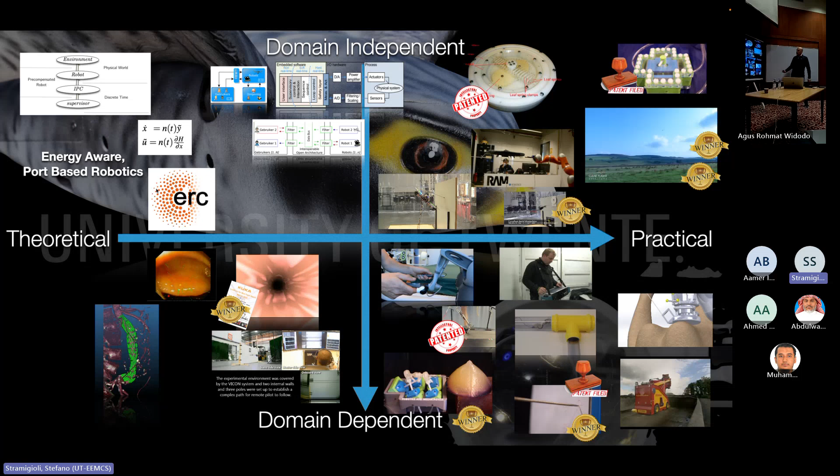So this is just a glimpse of some of the activities of the lab. It's really from very fundamental theoretical work to very practical work. Some things are domain independence, like software architectures that you can apply to any kind of robot. Or if you go specifically to the medical domain, you need a lot of knowledge in the domain itself, or in inspection and maintenance, you should know about ATEX regulation for explosion and all these kinds of things. This is a glimpse. These are some of the things I will talk about, mostly what is here.

Tomorrow I will show some of the actuation technology which we developed, which is MRI technology. We have a patent, we have a company now with 35 people working in London. I cannot say a lot about that company, but we'll actually hear, I'm sure, in the coming year.

So more about the talk now. Robots are physical systems, and energy is the mathematical embodiment of the invariance of a lot of physical laws. I'll come to that later.

Physical interaction of robots with humans or the world is the core of a lot of robotics applications, and mathematics is the powerful tool the engineer has at their disposal. But nevertheless, far too often, in my opinion, engineering is done without looking at physics and not doing the mathematics precisely. I've been trained as an engineer, and I think what I do now, I'm more a mathematician and theoretical physicist. But my heart is in engineering. The way to look at nature, to look at things in the engineering way, you can do much better than the physicists can do, in my opinion. But the precision that is learned in physics and in mathematics, I think that's a good combination. That's my opinion.

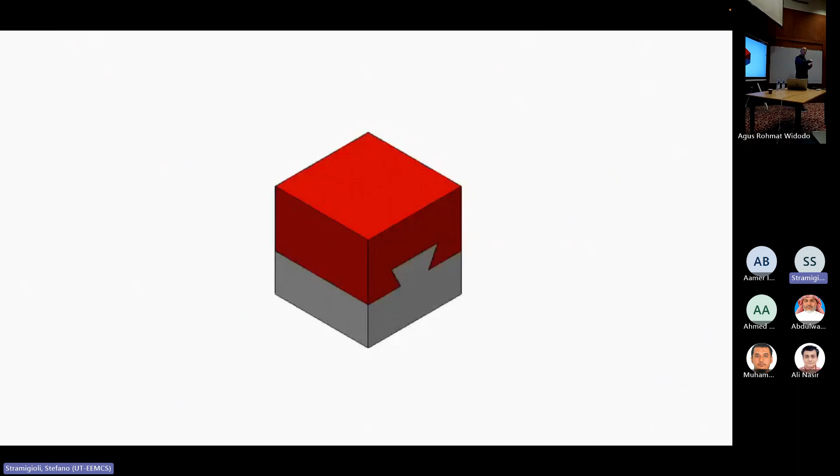I want to play a game with you, ladies and gentlemen, about a paradigm shift. Do you know what this is? This is called a dovetail. These are two pieces that mechanically can be inserted. In a lot of assembly, this is used. It basically fixes 5 degrees of freedom and leaves 1 degree of freedom free. So this is basically, you can shift it and it will slide in this way.

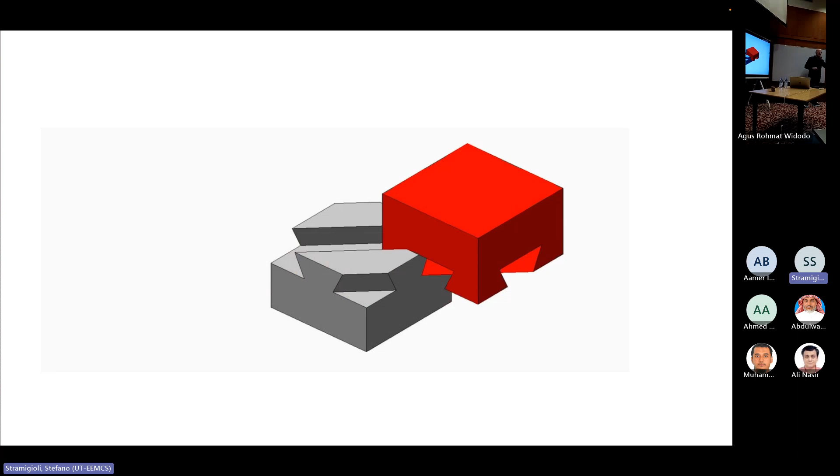Now, can these two blocks move? Who's for yes? Please raise your hand. Who's for no? Please raise your hand. Well, it can move. What's going on here? You see, sometimes we look at things and we do not think hard enough, and just from the surface we draw conclusions. This is, by the way, not only a problem in science, but in society in general. But that's a more philosophical story. I think you see now that you need to think further than what you see.

And the question is, beside the symmetry diagonal, are there other ways this can move? What do you think?

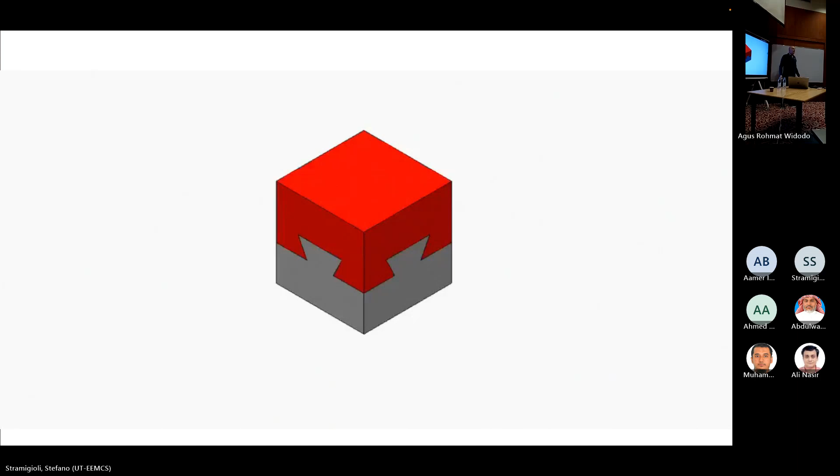And now you start getting the point, right? Now you are critical, you're thinking. So you see, there are actually an infinite number of things.

All those motions which keep invariant what you see in the front are possible because you don't see what's behind. So there are a lot of these motions. I'll skip, there are many that I could show you. But the bottom line of

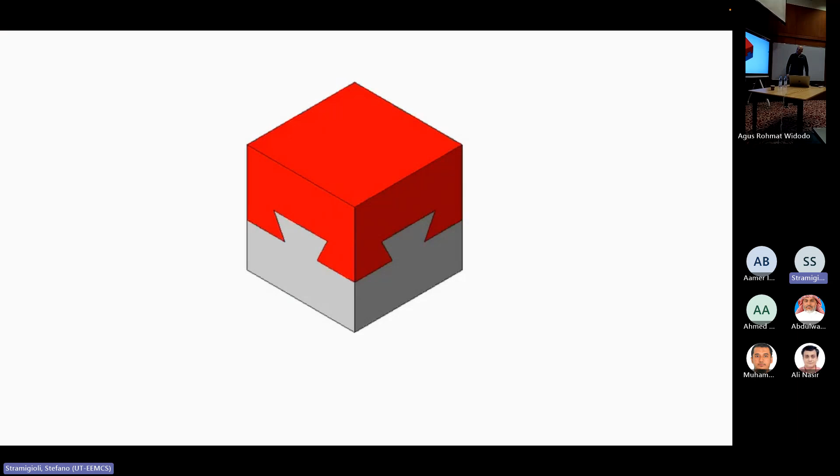this discussion is that it's very important in science to break out of the box, to think about what your preconceptions are, and sometimes just to think crazy. It really can help.

So what I want to try to give you is some idea of this out-of-the-box thinking during this lecture, and I hope you will appreciate some of the ideas and will be triggered to look into it a bit more deeply.

The very standard way to do a lot of work, like for example in computer vision, is what is called the pipeline way. You have a part interacting with another part, the part interacting with another part, or you process software-wise some things in a certain way.

That's not the way nature works. Nature works very differently. Whatever you do, you always have a feedback. So if I shake hands with somebody, it's not that I force the position or the force. It's just the way the dynamics interacts between these two things.

And this is deep, because this is not just shaking hands, this is everything in nature. I'm actually working on this in quantum theory as well, also these things, the collapse of the wave function.

I don't know if you have any background in quantum physics, but there are a lot of things that physicists just use that are conceptually actually wrong, the wrong way of doing it. And Newton told us that action-reaction is basically one of the fundamental things in nature.

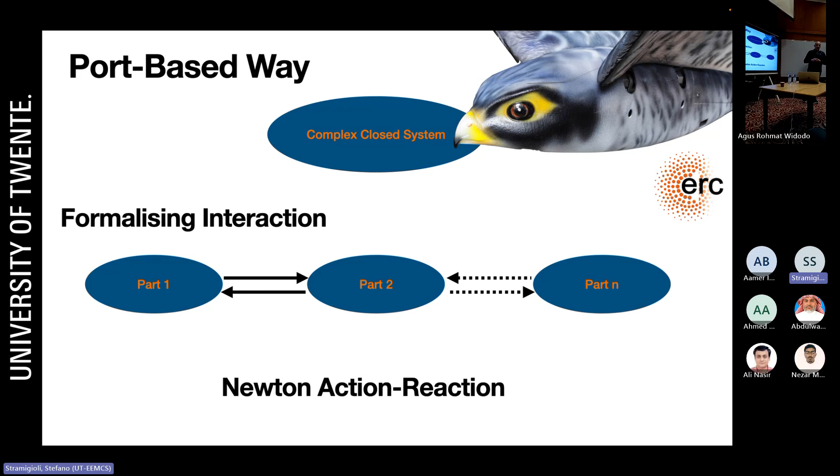And I will tell you more about this in the context of these birds. I like philosophy also, and Aristotle says in all things of nature there is something of the marvelous. It's unbelievable if you look at certain things in nature, how beautiful the world is.

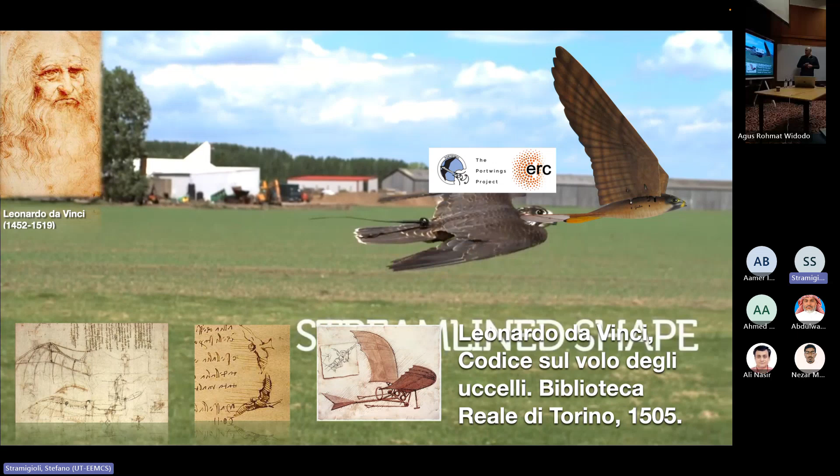And being Italian, I cannot avoid talking about Leonardo. Leonardo da Vinci, who I hope you have heard of, more than 500 years ago was fascinated by the beauty of birds, and he started to study birds. Of course, he didn't have the mathematics that we have now.

Actually, I gave them an honorary degree from the university as divulgators of science, because a lot of young people's attraction to technology has been inspired by them, especially Jamie. Jamie's a very nice guy, and he's very deep, by the way.

With him, we tried to work on something with the Mythbusters, trying to fly a person. But Discovery Channel at that time was more into explosions. It's cheaper to make explosions, and easier, than to do some good science. So it didn't work out eventually.

But if you look at science, if you look at nature, if you look at a picture like this, you could just watch it for quite a long time.

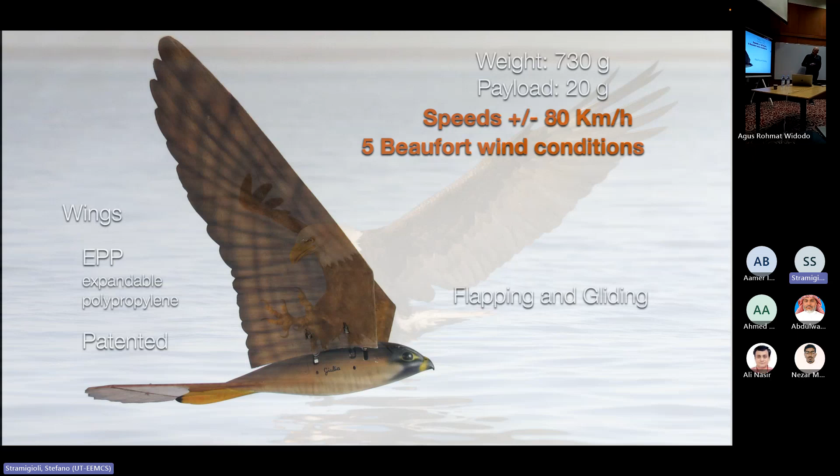So what we've done in Twente, we have this bird. It's a robotic bird which is actually like a falcon. It weighs like a falcon, and it has more or less the same flapping frequency as a falcon.

It goes up to 80 kilometers an hour in a force 5 Beaufort wind. There are a lot of toys and things that fly around, but there is no other toy that I know of in the world that can fly at that speed in that wind condition. So this is really unique.

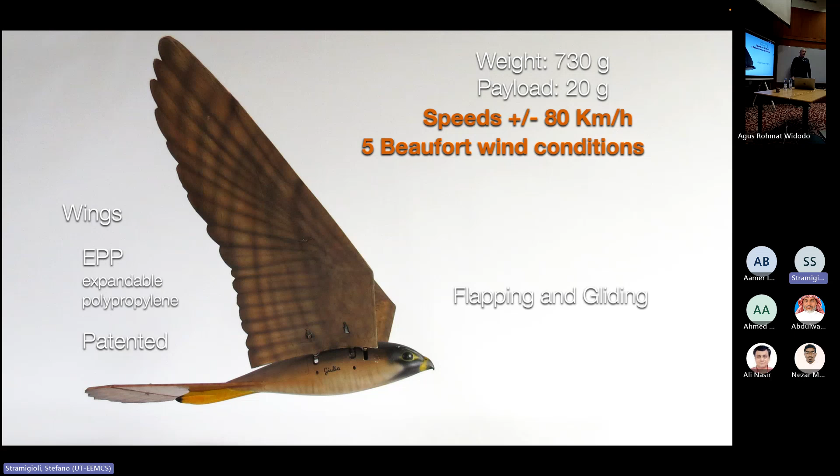And we got a lot of attention with this thing, a number of awards and recognitions: we took the Tech Transfer Award, the Best Paper Award, the cover of the Robotics and Automation magazine, etc. So it's a very, very nice device. But the question is, of course, why does it work?

How does it work? Computational fluid dynamics includes the hypothesis that if you have a plane with a fixed wing, you don't like turbulence. You want laminar flow, which creates a pressure difference that gives you lift. Every time there's separation of flow from the wing, that's a bad thing, and then you start shaking a little bit.

But birds do nothing else than that. They move their wings in a way that generates these vortices and shedding, what is called a reverse von Karman sheet. You see here, it creates a jet, and that's how the propulsion of a flapping bird actually comes around.

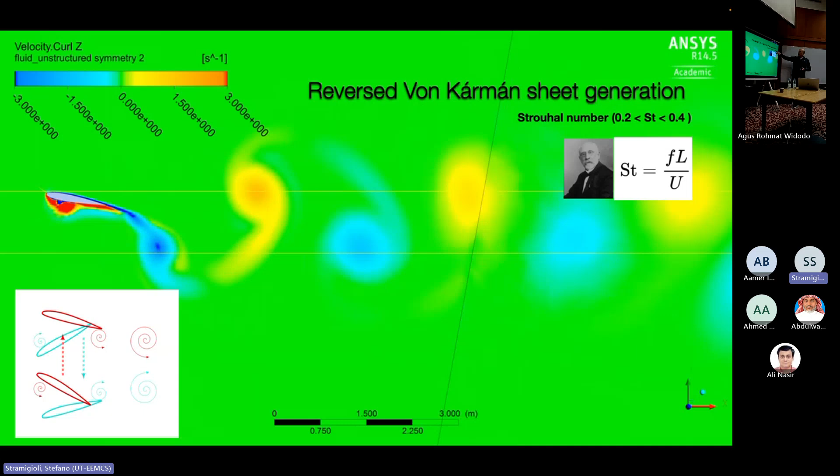It turns out there is a Strouhal number, a unitless number that characterizes this situation. All animals that either fly or swim have a Strouhal number between 0.2 and 0.4. So there is something in these relations, but that's as far as people have an idea about it. The question is why and how does it really work? Only understanding can systematically give you insight and make it even better than what it is.

I like very much Wittgenstein. He was an Austrian philosopher and mathematician, and he said what we cannot speak about clearly, we must pass over in silence. There are a lot of politicians nowadays that have never heard about Wittgenstein.

But anyway, I think that if you want to understand how flapping flight actually works, you would like to understand much better how to do it. And I believe, and I was confirming this belief, that port-based thinking was the way to go.

I was very, very fortunate to set up a fantastic team. You recognize some people there, okay. And so here is our friend here, Ramy, and it was phenomenal.

For me, this project was just a gift from heaven, because I rediscovered - I was very busy, I'm a big group with a lot of management things, and during this project I realized that what I want to do until I die, and I hope to live long enough, is to do science. This was the first step on that. I'm very, very fortunate that I got this project and that I had to work with people like Ramy and others that I really enjoyed, not only from a scientific but a personal point of view.

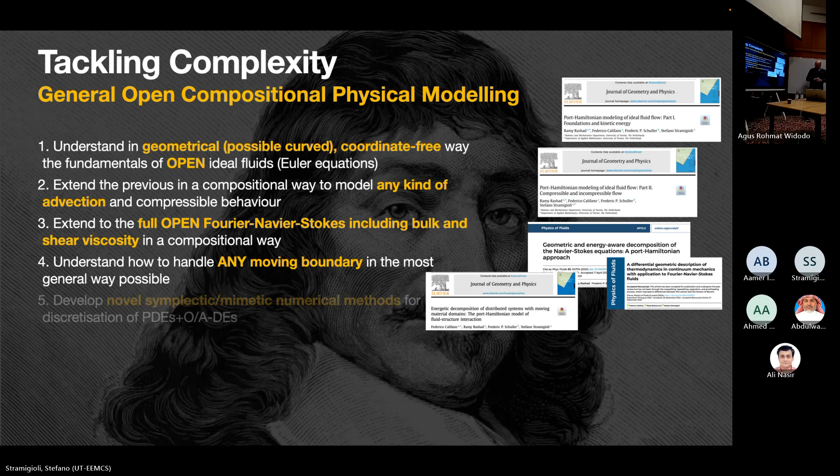And then we had basically sorted out everything about fluids in a continuous setting. But of course, if you want to do some engineering, learning, or control, you want to discretize stuff. You want to have numbers, you want to program in the computer. And this was actually a crucial point in the project, because we realized we had learned half of the story without looking at the numerics. Looking at the numerics, a lot of things came out that we were blown away by. These things now, with this physics stuff I'm working on, play a big important role. We found a way to do numerics in a way that is called structure preserving, and I will say a few things about that later in my talk.

And then we went to the elasticity, and this was really a phenomenal work that Ramy did. He led the writing of these papers, these two papers. As far as I'm concerned, these three papers are basically characterizing nonlinear elasticity in the best way that I've ever seen. Of course there are geniuses of science like Jerry Marsden from Caltech who have been working on these things for a while. But he, for example, did something that was hiding stuff, and we actually had a discussion about these things many times.

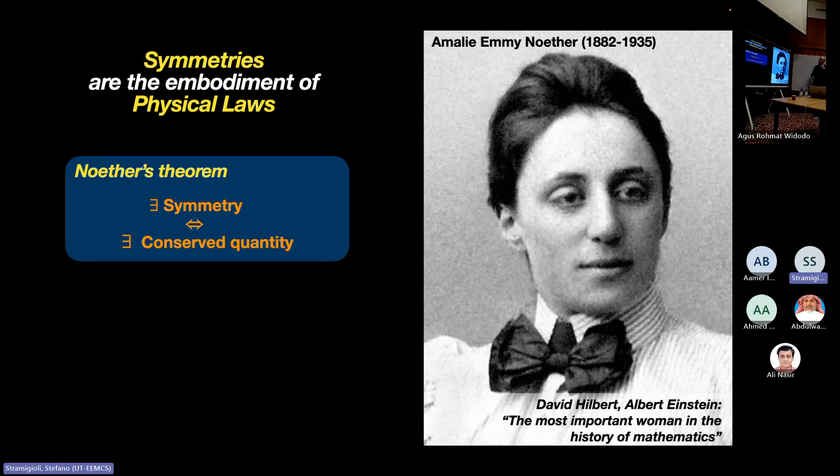What Noether's theorem says is that if you have a symmetry, then there is a conserved quantity. That's basically the core of the theorem. She's known for that in physics, but the group theory she developed is much more than what's actually known in physics. And what is energy? As an engineer, we use energy all the time, but she was the one who actually understood what energy is. In this history, I could give a whole history.

I have slides about the history of thinking about energy. Clausius and Joule and all this was an experimental thing that people tried. But what it is became clear from this.

Energy is nothing else than a thing that is conserved because physical laws are invariant in time. That's it. So you know that energy is not an absolute thing, it's what is called a gauge value.

For me, the kinetic energy of that laptop, for you, the kinetic energy of the laptop is 0, right? But for me, it's not 0 because it's moving backward. So you see, it's not absolute, it's dependent on the observer, okay?

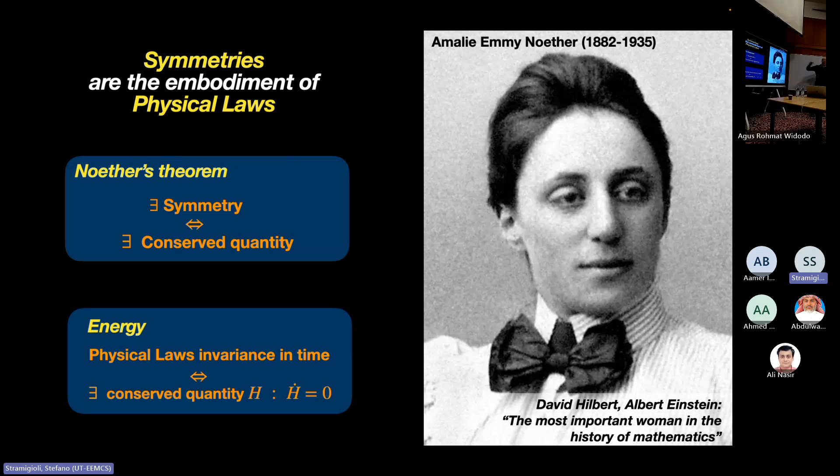Instead, power is something which is absolute. And anyway, there is a lot to be said on this story. If you have a question, I will be more than pleased to tell you.

Albert Einstein says, all laws of physics will one day be overthrown, but what will always stay is thermodynamics. And in fact, what I'm trying to develop in the theory I mentioned before is precisely what comes out. Information theory and thermodynamics is everything. The rest is what comes behind it.

And so the idea of using energy as a kind of Esperanto, as a lingua franca that everybody speaks, is an interesting thing. And this is known in physics because Hamiltonian theory is the base of classical physics, the base of quantum physics.

But what Port-Hamiltonian system theory can give you is actually a Lego physics, because it has not only the idea of a generating function like an energy function that gives you the dynamics, but it also has a way to compose things via these ports, in a way which is very typical of engineering thinking.

In network terms, like Kirchhoff's laws and kinds of things. The mathematical structures are different, but for example, normally in Hamiltonian theory you think top down. Instead, in Port-Hamiltonian system theory, you develop the kernel, the atomic parts, and then you can build it up by interconnecting it by ports.

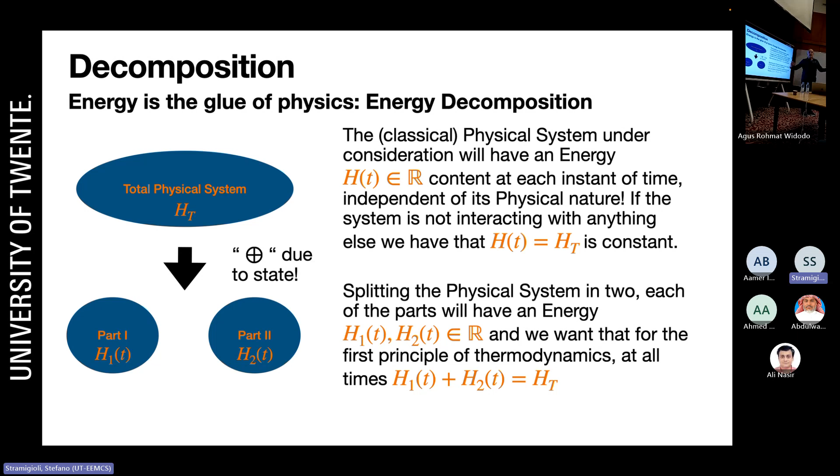So let me tell you how this works, very roughly. If we have a physical system and we accept the fact that, due to the symmetry of physical laws, we have this concept of energy, which is very useful, the question is, suppose I want to decompose this system into two parts. How do I actually describe this interconnection? What is the proper mathematical structure that I need?

If I want to keep as a guiding principle the fact that energy is conserved, that means that if I split something, the total energy I had is now partially on one side and partially on the other side. Then I have the situation that if the energy goes down from one side, it will go up on the other side, because the total energy should be conserved.

Now something else, the action-reaction I told you before, comes into play, because you say, this symmetry - why should one part of the system be more important than the other part of the system, right? So there is the dual influence. It should be able to turn it around and have the same kind of reasoning.

So we can say, okay, there is something, we don't know yet what it is, which I call E, something else that E - this guy basically sets E for this guy. And so this is an output of this somehow, and it's an input for this, and the other way around for F.

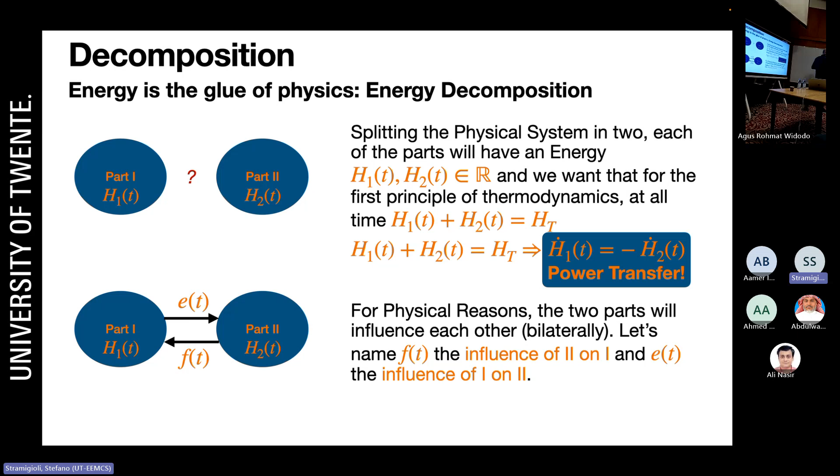And then the question is, what is the nature of this E and F in order to be able to say something about it? The interesting thing is that this power, as I said, is invariant. I told you energy is not, but power is. If I look at the power transfer between two systems, whether you observe it or I observe it while moving, it's exactly the same. And power is a scalar, it's just a number.

That will give us the answer, because the structure, the nature, tells us these two, E and F, turns out Kirchhoff laws play into the game, that one should be a vector space, an element of a vector space. And the other should be an element of what is called the dual of the vector space. What is the dual of a vector space? By definition, it's the set of linear operators on the elements of the vector space to a real number, which we call power.

So when you study mechanics, electricity, electromagnetism, or fluid dynamics—let's take the mechanics example—people say that forces are vectors. They are not. Well, actually they are vectors, but different vectors than velocities. If we call velocities vectors, forces are dual vectors, because if you pair a velocity and a force, whatever dimension they have, you get a real number, which is called power, and that is invariant.

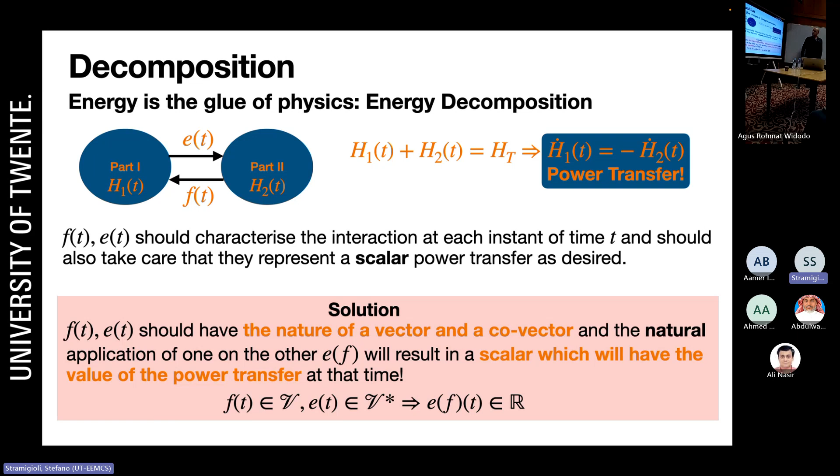So it turns out you can write this with what is called the power bond. This power bond characterizes two things at the same time. I even got rid of causality here—I'm not telling you who's giving what. I'm just telling you if this gives E, the other gives F, but it can be the other way around, because this half arrow only indicates that if I pair these two things the way I told you, I get a real number. If it's positive, the power goes this way; if negative, it goes the other way. So this arrow is not a causal arrow, it's a positive power energy arrow, okay?

And it turns out that for electrical circuits, this vector space is real, just a real number. So velocity and currents are just real numbers. It's easy, there's no geometry there.

But if you go to multi-body dynamics, it turns out these are what are called algebras. In fact, any physical system, if you want to decompose it for reasons that are very subtle—and I actually want to write a tutorial on this because people don't see this—needs to be Lie algebras. Lie algebra and Lie groups are a part of mathematics about symmetries, everything that Noether described. And if you go to infinite dimensional systems, things get into tensor-valued forms, and then the sky is the limit—you can do any kind of modeling you ever think about.

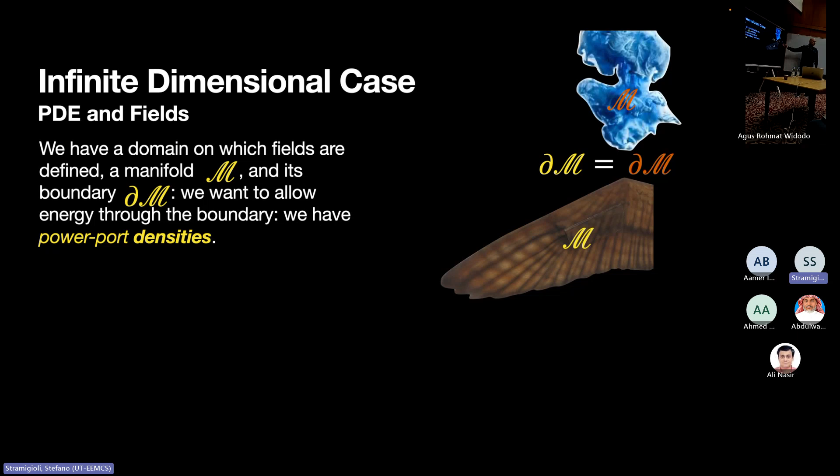I don't have time to go into details, but I'd be more than pleased to tell you more separately. The idea is that if you have a fluid and you have a wing and the boundary in between, you want to develop a mathematics that would work not only in this case. That was the goal—it should work in all dimensions, be coordinate invariant, applicable to all physical domains.

And possibly in curved spaces, because one of the things, for example, in space-time, you want to have curved spaces to handle gravity. And the only way to do it is exterior calculus.

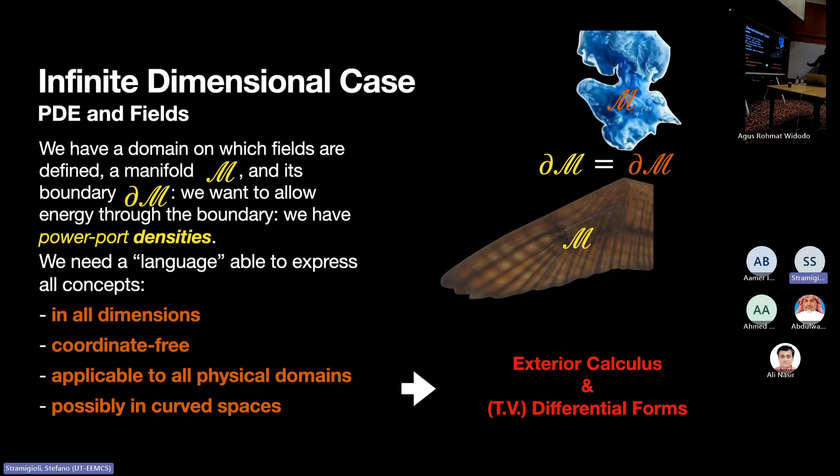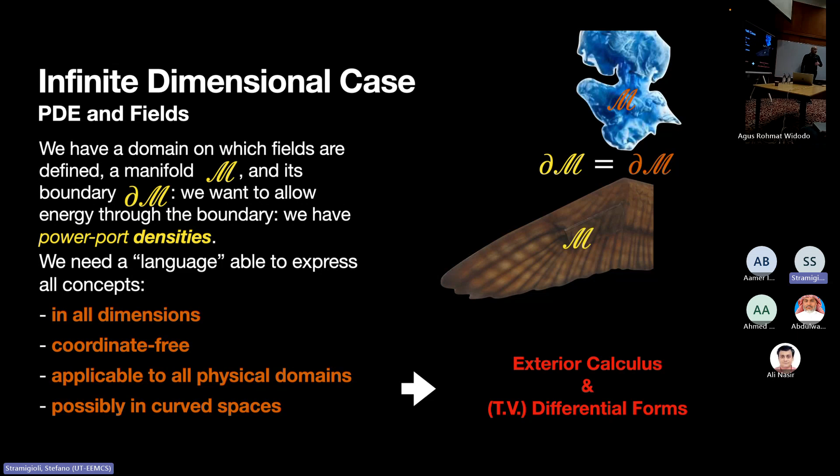This was something that was not taught to me as a student, but I have realized that this is the way that really, in my opinion, we should do integration. And I'll tell you why. This is a slide I showed yesterday as well.

Vector calculus, which is the standard way everybody does PDEs kind of stuff, was actually developed by—I missed Heaviside, there should be Heaviside in between, I've forgotten in these slides, I used an older slide.

Because Maxwell, when he did the Maxwell equations, actually used quaternions to do that. It was mathematically developed by Hamilton, and then Heaviside worked on these things and modified them with the divergence, gradient, rotation, and all the things that we now teach to our students.

But the point I want to make here is that Riemann put in integration, so Riemann integration that we learn. But then a lot of other guys came in—Élie Cartan, de Rham, Grassmann, Poincaré—and we are still teaching vector calculus. Vector calculus is inferior, is worse, is not generic, etc. And vector calculus, in the treatise on electricity and magnetism from Maxwell, is 152 years old.

And we are teaching Riemann integration, which is 171 years old. And we know physicists know that Riemann integration is bad—there's Lebesgue integration, because if you want to do through integrals and infinities, that doesn't work with Riemann. Lebesgue is better. But exterior calculus is even better.

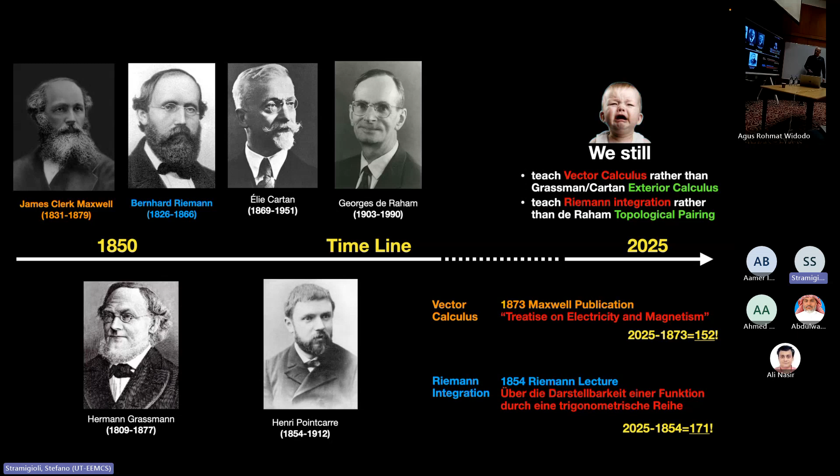I'm completely blown away about how powerful this piece of mathematics actually is, and we discovered it, and I went even further on these things. I'll skip this slide because I've mentioned it, and just to give you a glimpse—why is this so beautiful? Because once you have these things done to do the PDEs, you get a lot of insight to do discretization for free.

Because if you do discretization, what you have—these are symbols that you don't know, but this is a field. A field is nothing else than something which has a value everywhere, a vector field or tensor field of any kind.

And once you want to discretize, what do you do? We just take the space the field is defined upon, and we split it into pieces. So we divide it into blocks, we mesh the environment, and then there's a process to associate to this mesh certain finite numbers that describe physics. So you lose information, right?

But then you can parameterize with functions, partial finite elements—that's called finite elements. You associate functions to these values that you give, and then you can reconstruct the physical space, which is called interpolation. So basically what discretization is in this context is, you take this vector space—it's an infinite dimensional vector space.

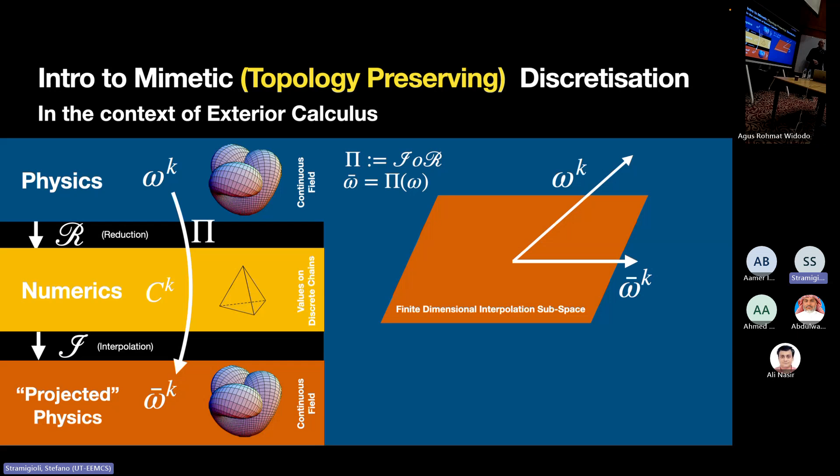I can show you on the board a finite dimensional vector space, but you should think about it as infinite dimensional. And this orange subspace is a finite dimensional vector space within the infinite dimensional vector space, okay?

So the physics is basically the field, the real field we want to model, is this vector. By means of these things, we project it onto the space generated by the mesh we did. This is basically the finite element reconstruction, and this is the error that we compute in this finite element way.

The magic of this stuff is that this map, if it is commutative with respect to an operator D, which is the operator we use in differential calculus, intrinsically baked into this exterior calculus, then we get what is called topological preserving discretizations. And that means we can do things much more precise than anything else.

I am 100% sure that if we implemented this in proper software, ANSYS would be out of business. With this technology, we have examples where we take a mesh of just 3 elements, and it will be stable. It won't give you the best result with 3 elements, but it will be stable. That's not how ANSYS works - with those tools, if the mesh is too small, it gets unstable and you get funny results.

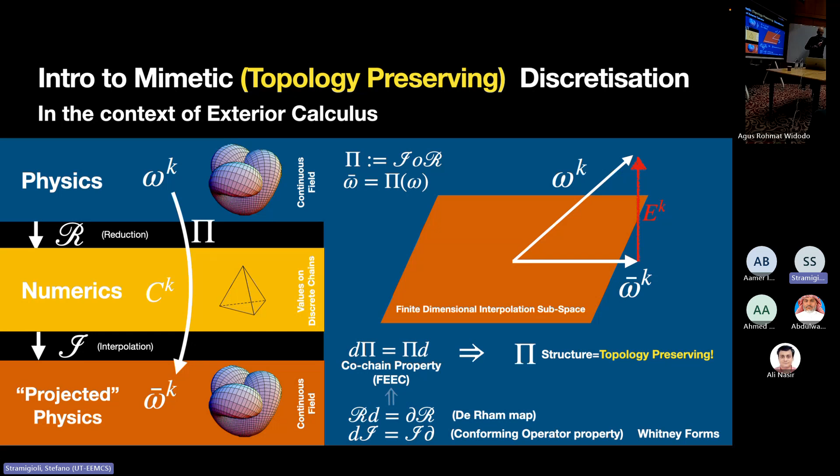It is really, really powerful, and there is a lot more to be said that I will skip for time. Let me conclude - this method is much better in a lot of ways, also with respect to time and simplicity of integration. There is a lot to be said.

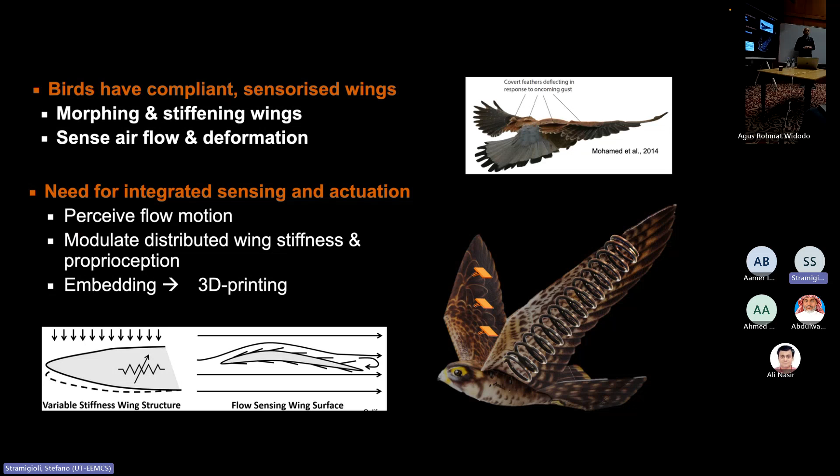I want to tell you a few things about the technical side - what we did from an experimental point of view - and then show you a video and close down. From a more technological point of view, we've also been working on how to manufacture, for example, the wings or certain sensors in the wings. We've been working on printing carbon-doped material into the polymer so that we could measure the deformation on the various parts.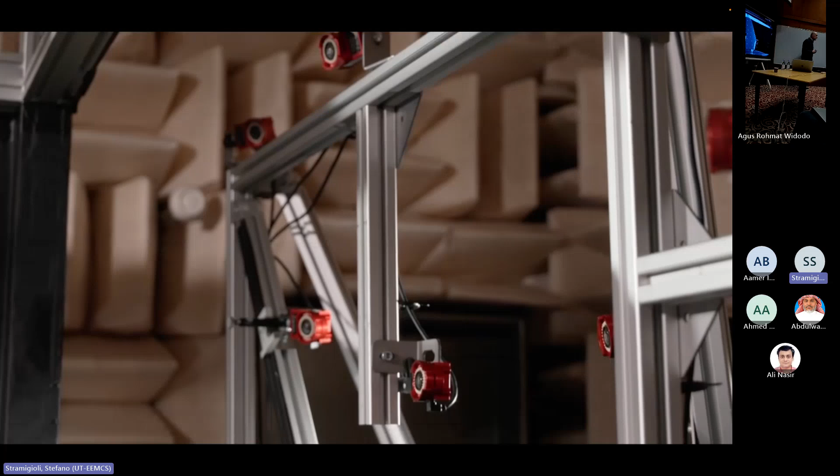And I bought a very expensive toy at that time - I have a 230,000 euro bubble generator just to make a lot of bubbles to seed the flow. You will see the experiments. Thanks to that, we could grab a lot of 3D fluid dynamics data. And this, of course, is not steady flow - this is unsteady flow. It was a very complicated campaign that we did.

I'll show you now a video that we worked very hard to build and coordinate. And Rami, what happened?

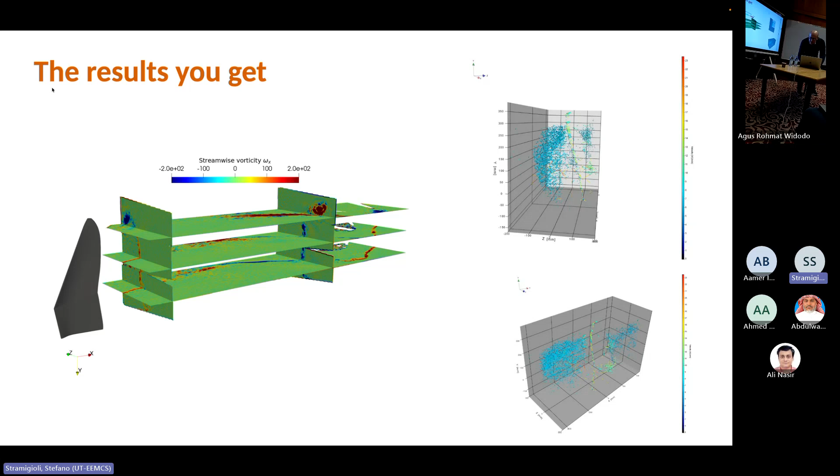Oh gosh. I forgot to, because I cannot. Oh, this is really annoying. Okay, well, maybe it's not too bad. Let me just put this, if I can. Well, hopefully it will not be cold anymore.

So let me show you the video.

Nature is amazing, and birds are amazing creatures, but we do not fully understand yet how they can fly. Could we really understand the magic of flapping flight so that we can build robots that can fly better than the robots currently available? The robird is the only robotic bird in the world which can fly in up to 5 Beaufort wind and at a speed of 80 kilometers an hour, and can be autonomous. It looks like it, but do we really understand the underlying physics?

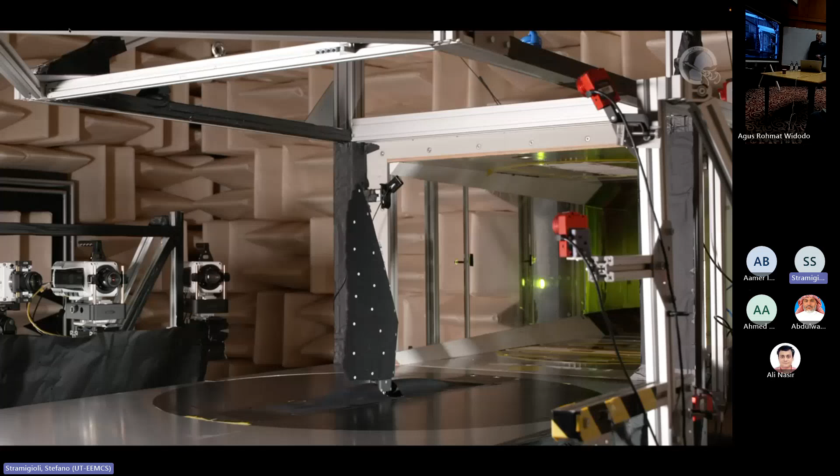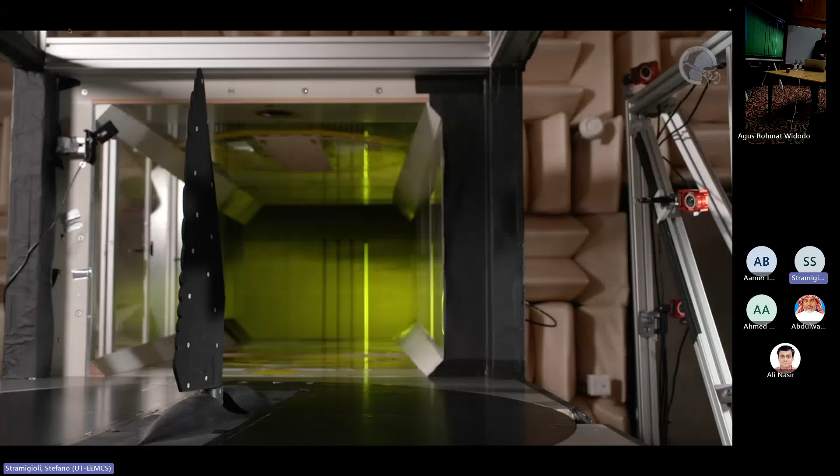We believe that flapping flight is achieved with a combination of flapping and twisting of the wings, which creates detached vortices that generate thrust. But are we currently using the optimal combination of the oscillatory pitching and plunging motions of the wing? To answer this question, an experimental setup is built in the wind tunnel of the University of Twente to see how the wing moves and how the stream of air moves around it while flapping. This allows for exploring the optimal wing motion for the robird. A helium-filled soap bubble generator blows thousands of bubbles per second into the wind tunnel, and 4 high-speed cameras film the bubbles to capture the movement of air around the wing with the shedding of vortices.

Furthermore, a force sensor at the root of the wing can measure the resulting forces on the wing, like lift and thrust, and reflective markers on the wing can be filmed with cameras to track the wing movement and deformation at a sub-millimeter scale. We've studied the flexibility of the wing since it's an important part of why the robird flies the way it does.

Different than many people think, intelligence can also be embodied in the material and properties. A brain without a proper body is useless for locomotion. We want to bring this physical intelligence into the wings of a robotic bird, and in order to do so, we created smart wing designs and smart mechanisms which are able to change the mechanical stiffness of the wings to change the flying behavior.

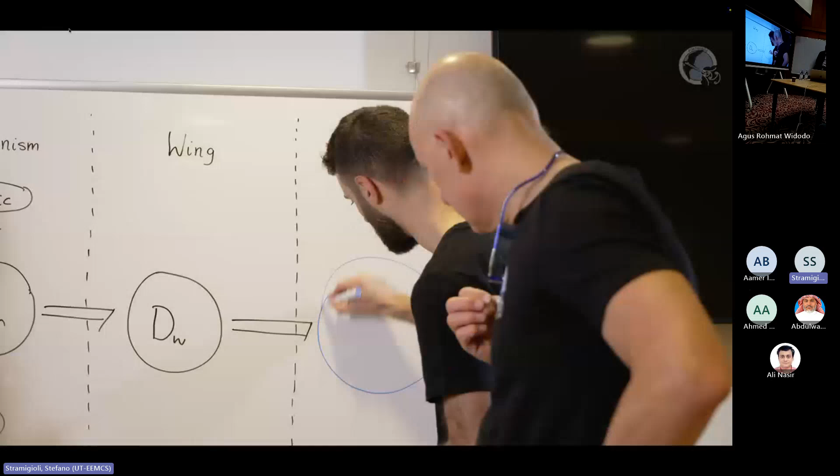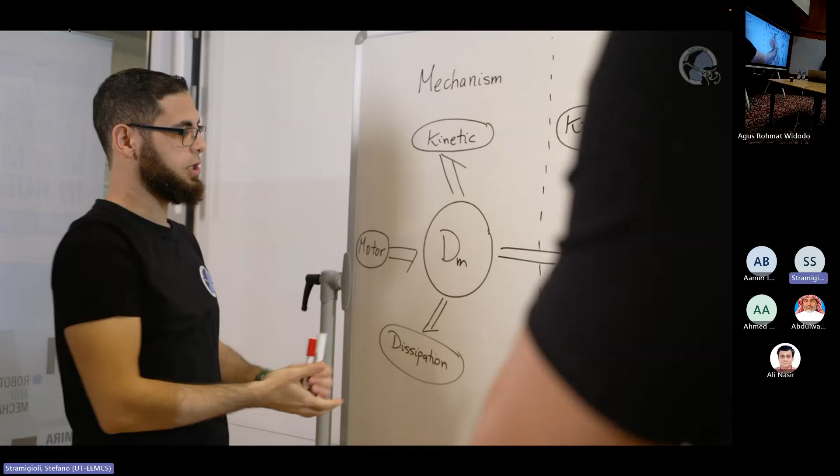But how can we precisely describe the physics of a robotic bird with deformable wings interacting with the air around it? The unique feature of the approach we followed to describe dynamical physical systems is that it relies on energy and geometry. Energy is probably the most fundamental concept unifying the various branches of physics and explaining how nature works. In the Portwings project, we used the Port-Hamiltonian framework to get insight into the energetic fundamentals and transport phenomena of fluid dynamics, structural dynamics, and fluid structure interactions.

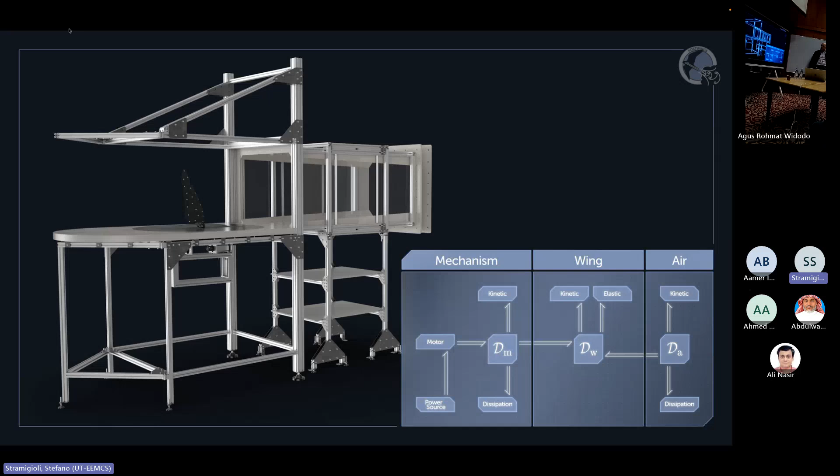In the Port-Hamiltonian framework, we describe any complex physical system as a network of energetic modules interconnected using power ports that characterize the energy flow within the system or exchanged with the environment. For example, if we consider the flapping wing setup we developed, we describe it as a network that represents the dynamics of the driving mechanism, the elastodynamics of the wing, and the aerodynamics of the air around it.

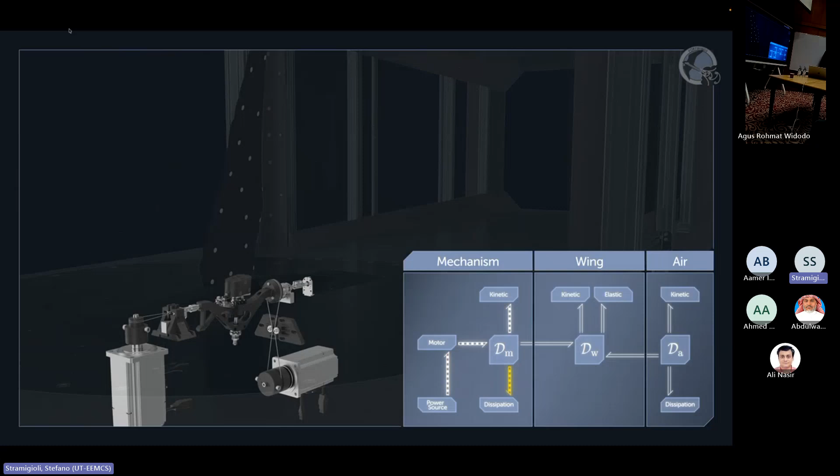The power supplied from the power source flows to the electric motor, and then some of it is stored as kinetic energy in the mechanism's inertia. Some of it is dissipated as heat and noise, and the rest goes to the flexible wing. The power supplied from the wind tunnel is also transferred to the wing through the moving boundary of the wing and the airflow injected inside the wind tunnel.

In each cycle of the wing's flapping, the power supplied to the wing oscillates between kinetic energy and elastic potential energy, while the power that flows to the air is either stored as kinetic energy or dissipated in the vortices formed due to the wing's flapping motion.

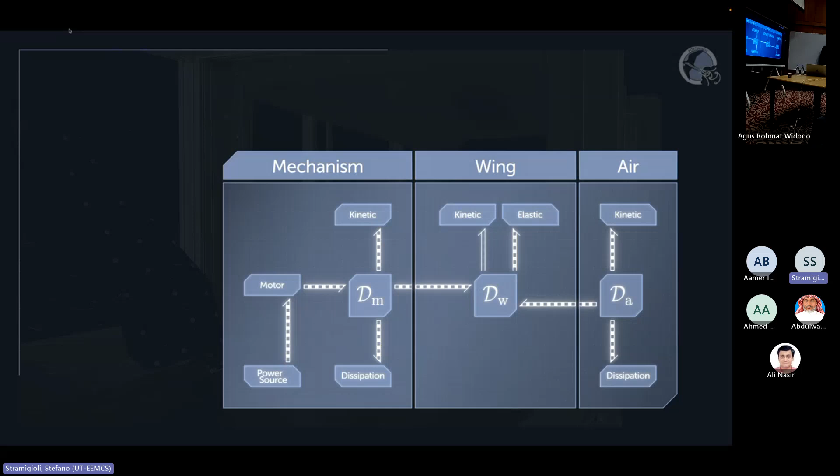A Port-Hamiltonian description of this physical system differs significantly from the standard approach of continuum mechanics using coordinate-based tensor calculus treatments. We rely instead on coordinate-free exterior calculus and describe the network structure of the system using so-called Stokes-Dirac structures. This methodology allows us to intrinsically handle open boundary conditions and thus use, reuse, and combine sub-models in such a way that a real Lego of physics would be possible.

Consequently, this leads to the development of structure-preserving computational algorithms that allow us to efficiently and robustly simulate these physical systems to produce predictive computer models of the world around us. The real advancements in science and technology are only achieved with a deep understanding of the fundamental theory, as well as proper engineering and experimental skills targeted to the goal to be achieved.

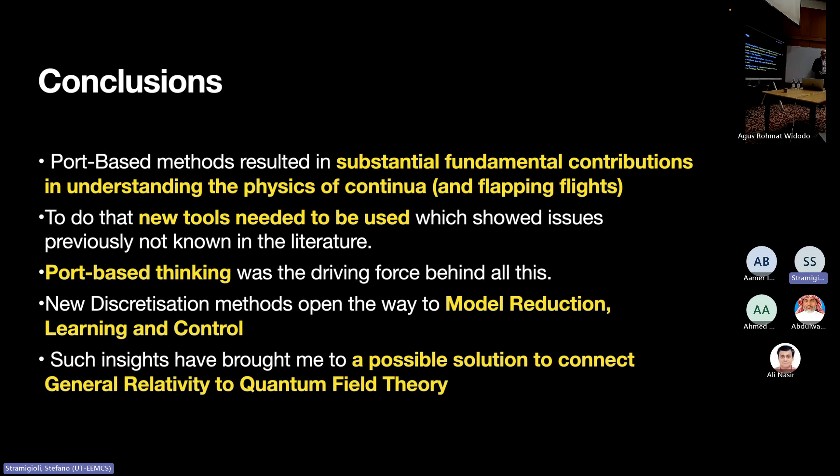It's like the dual fields - like I give you a velocity and I give you momenta, and I tell you it's one thing, what can you tell me about the thing? The mass, right? Because the mass is that's the goal. That's the idea. It's as simple as that, but then extended to infinite dimensional space. So that's what I do.

So this is for the students around you - my personal advice. I think that once you work on something, once you model something, my learning is that it's so important to choose the right mathematical structure.

If you use R^n, as I was saying yesterday in my seminar, R^n can be just a set, can be a Hilbert space, can have a lot of structure. Get rid of R^n. What is the structure you need for your problem? Choose it. You should have enough structure, but not too much, just enough to describe your problem.

And that has to do with what Poincaré was saying, that the art of mathematics is to give the same name to different things. What is it that you need to describe? Then let the mathematics guide you, because if you have a structure and you know that within that structure those mathematical operations make sense, that means those mathematical operations make sense for the problem that you describe with that structure.

You can define angle - for example, angle is what we use, but you can define angle between operators, and that has a lot of meaning. There is something in information geometry, for example, which is a name I always forget, it's an Indian name, very long, very difficult for me to remember. With this angle, you describe basically the distance between probability distributions of any kind. There's beautiful stuff that just the mathematics can lead you to.